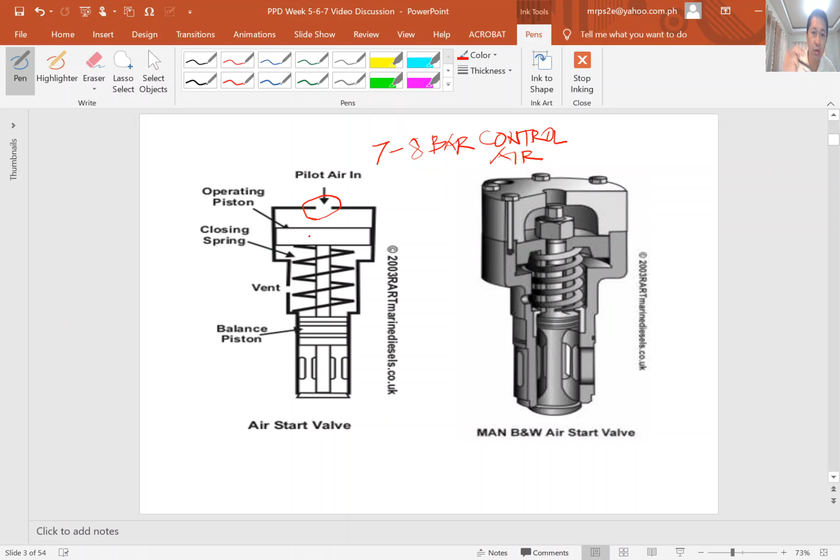So that in this area here will open. So here in this area will open the 30 bar. So later on we will see the diagram. So the 30 bar air starting pressure.

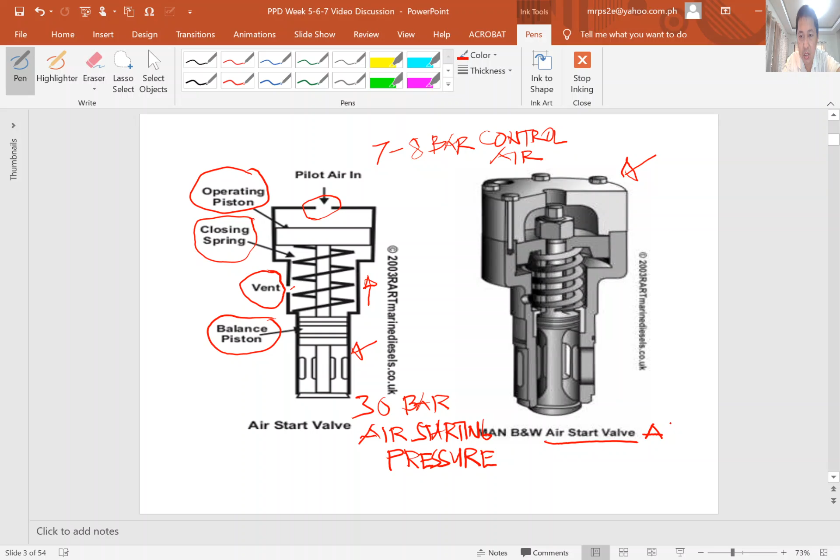So this is your air start valve or air starting valve assembly. So in the manual, or the engine instruction manual, this is written like this: assembly, air start assembly.

Next, I have here the exploded view of the air start valve of the engine. Since when I was ordering parts, I saved this picture in my computer, so now I attach it in this video. This is taken from the instruction manual, the spare parts catalog or the code book of the main engine which I worked on before.

So here I will show you, this is advanced knowledge for you. When you are ordering parts, for example, so this is the main engine code book in my ship before. For example, you are an engineer, marine engineer, so you order spare parts. In here, this one is what we call piston. So I will mark this one. This is piston.

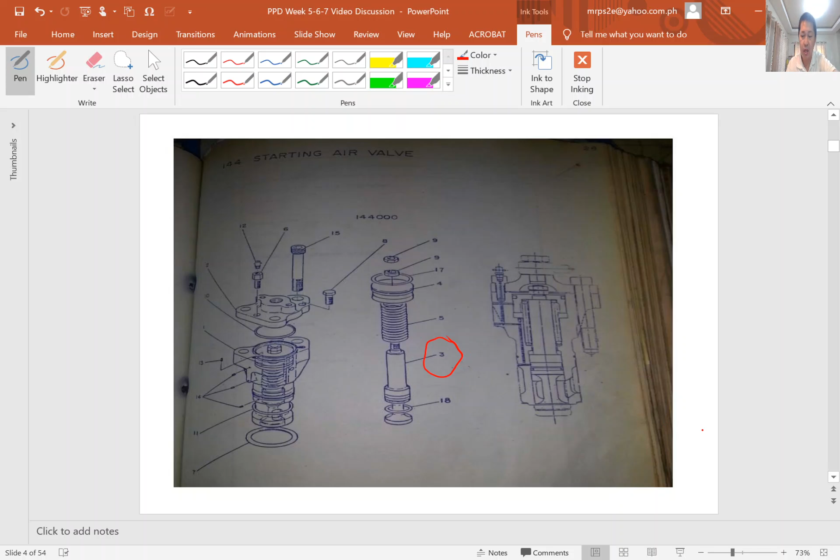So you will proceed to the next page. So here you have the number 3. So this is your reference number 3. This is number 3, and this is your description. Sorry, this is not the piston, but this is the valve stem. So this is the valve stem. So you write on your requisition form the reference number and your valve stem.

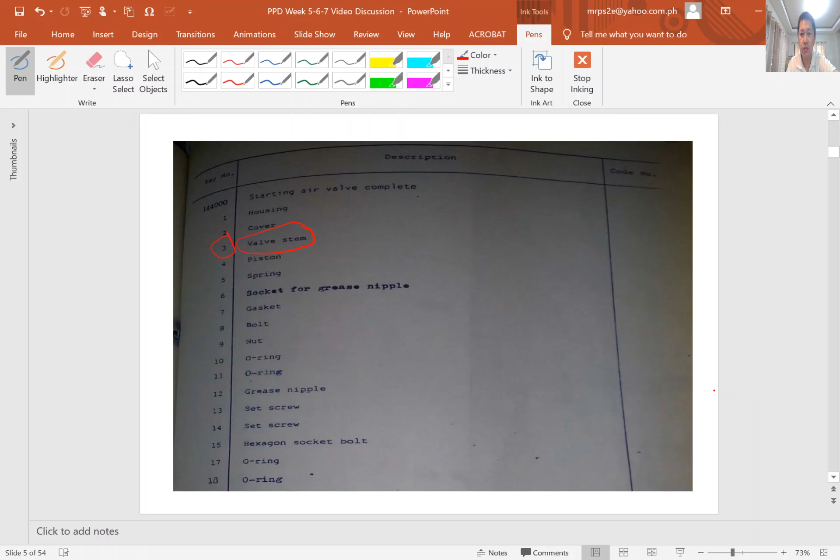But there is also another way, that there is a part number. So here is a reference number, but in most spare parts catalogs there is a part number. So we will proceed. So in another drawing, we will see another example of ordering spare parts. But here, we will discuss the system in which the air start valve is used, and its working process. So we will read the statement here below.

The pilot air enables the compressed air from the receiver to enter directly to the engine cylinders. The distributor valves provide air to operate its starting valve in the correct order and timing. The automatic or remote operating valve allows main starting air to pass to the start valve manifold.

So in this statement, I would recommend all cadets or all students studying this video, we will always use the diagram when we study the engine, because in this statement it is difficult for you to understand. So we will always use the drawing as well as the diagram to help understand the system. So now I will explain to you. I always recommend to my students to study the drawing and diagram in comparison to the explanation, so that we will understand easily.

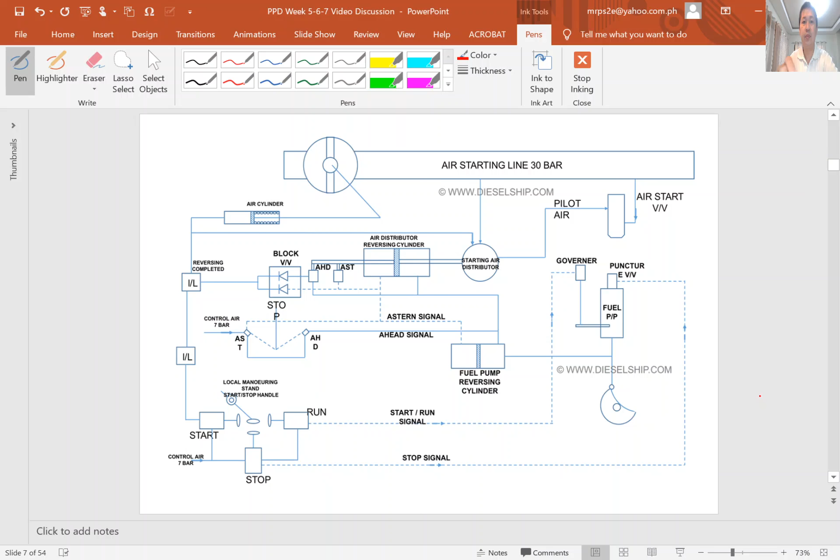So here, in this diagram, this is a simple diagram of the air starting system. So this is the diagram of the air starting system.

So now we have here the 30 bar. So this is 30 bar pressure. So from your air tank, it is traveling through the pipe. And this is your air cylinder. So it is showing here the local maneuvering stand.

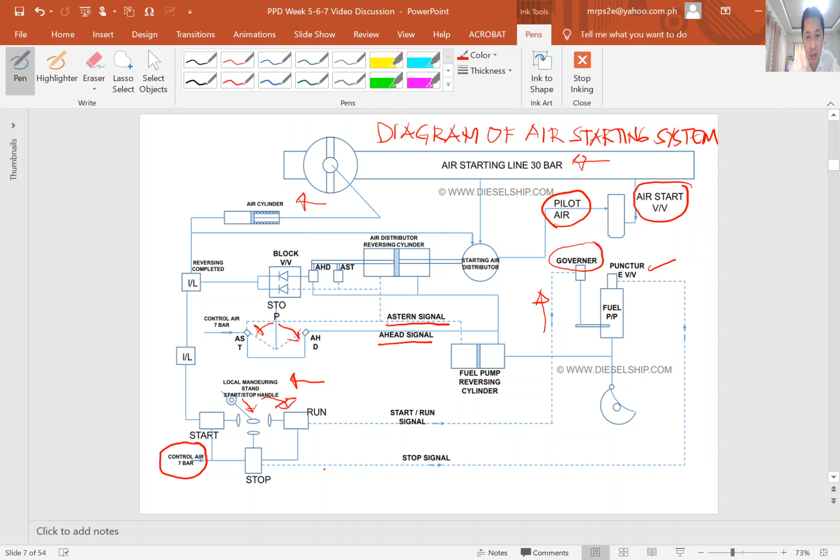And here we also have the puncture valve. The pilot air travels here to the puncture valve to open it. If this puncture valve is not opening, there is no fuel being pumped, because this puncture valve will open.

Actually, this puncture valve is a combination of the suction valve and the puncture valve. In some fuel pump systems, there is a separate suction valve on the bottom and the puncture valve on top. But there is also a puncture valve combined with the suction valve, as in this fuel pump. This is the puncture valve. So now you are ready. Now you start the engine.

So the 30 bar pressure, you see, this is the starting air distributor. When, for example, by the timing, cylinder number 1 should open. This starting air distributor has holes; for a 7-cylinder engine there are 7 holes: 1, 2, 3, 4, 5, 6, 7. When cylinder number 1 should be open, the hole of cylinder number 1 will open, and so on up to 7.

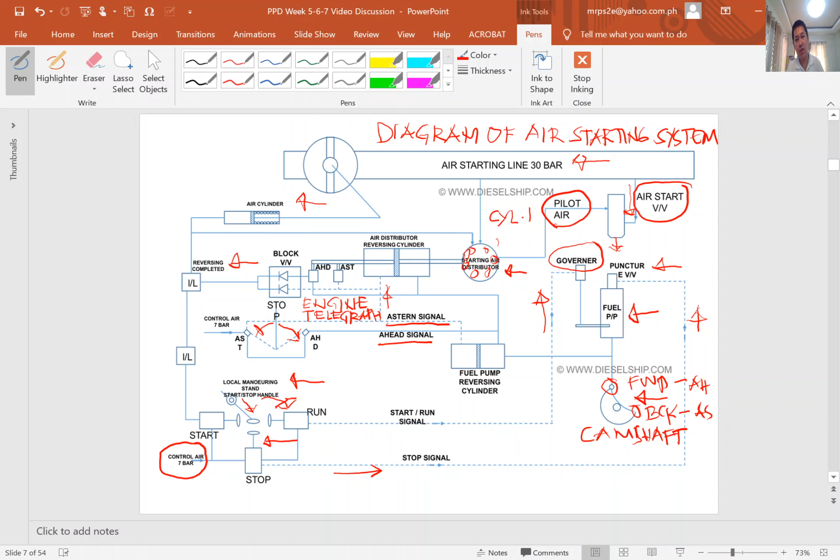You see here the reversing mechanism. So when the cam is here, you put the lifter here in the astern, so the engine will reverse, and you put the lifter here in the ahead of the cam, so the engine will move forward. So that is the reversing system.

So I will stop this video now.

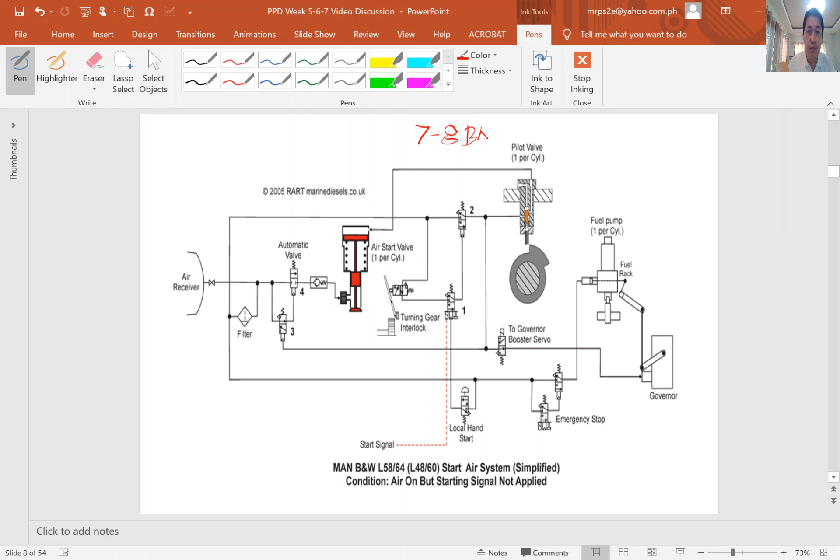We have here the starting air system also. So this can be also applied to the diesel generator. So we assume this system is used for the diesel generator. So the same principle. You have here the pilot valve. So this is pilot air, 7 to 8 bar. Pilot air.

So you have here the air start valve. See? This is air start valve, this one. And you have here the automatic valve. So this is solenoid. So by analyzing this drawing, you just start from number 1. See? Number 1. So you have the local hand start. Solenoid, just push the solenoid. And you have also here the emergency stop solenoid.

Now, you see this is pilot valve here. When you push this, we are assuming that this is used for diesel generator start system. So you have here the air tank, air receiver. So just open this valve. So from air receiver, the air will travel. So see, air travel here, go there, travel there, going here. So when you push this local hand starting, allowing the air to pass in here, going there to the

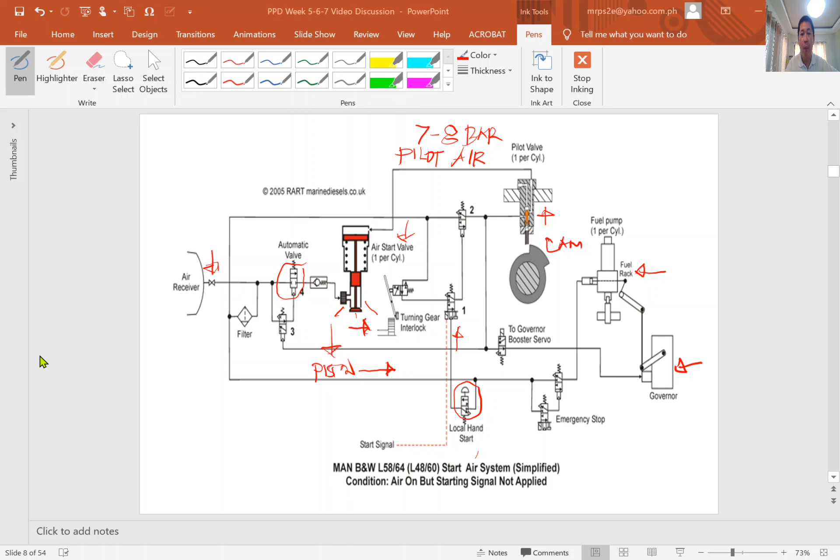So that is how the starting air works. So very simple, but when it's your first time, it is difficult to analyze. Now this is advanced knowledge for the cadets. So always use diagrams when studying the system. Next. So let us proceed to the cylinder head.

Cylinder head. A diesel engine cylinder head performs several functions. First, they provide the top seal for the cylinder or the cover of the cylinder bore or sleeve. Second, they provide the structure holding exhaust valves and intake valves where applicable for the four-stroke engine. Also, the fuel injector and necessary linkages. So that is the construction as well as the function of the cylinder head.

So remember, these are the basic parts fitted on the cylinder head. Or the function: seal the cylinder bore or the liner. Second, provide a structure holding the exhaust valve. So the exhaust valve is fitted to the cylinder head as well as the intake valve for 4-stroke engine. Fuel injector also is there.

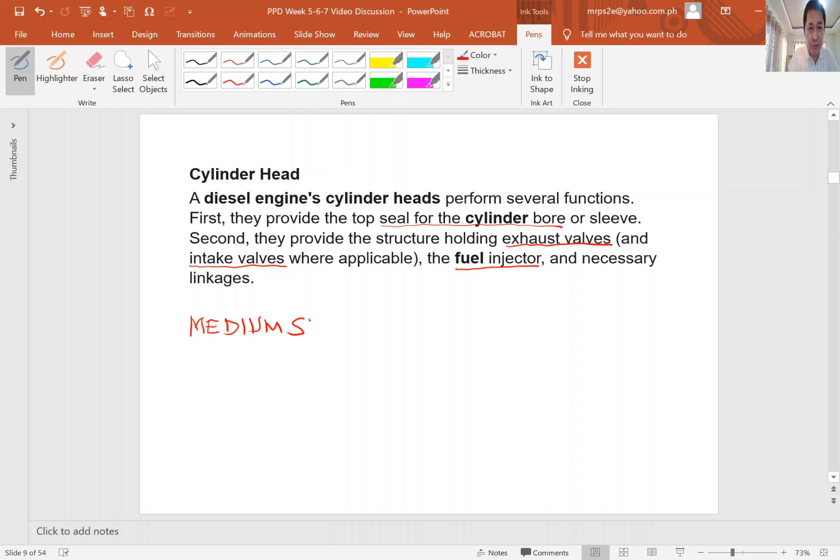And necessary linkages. So this is the function as well as the construction of the cylinder head. Next. So we have here cylinder cover. In a medium speed engine, just like the diesel generator engine, we call it cylinder head. So for medium speed diesel engine, we call it cylinder head.

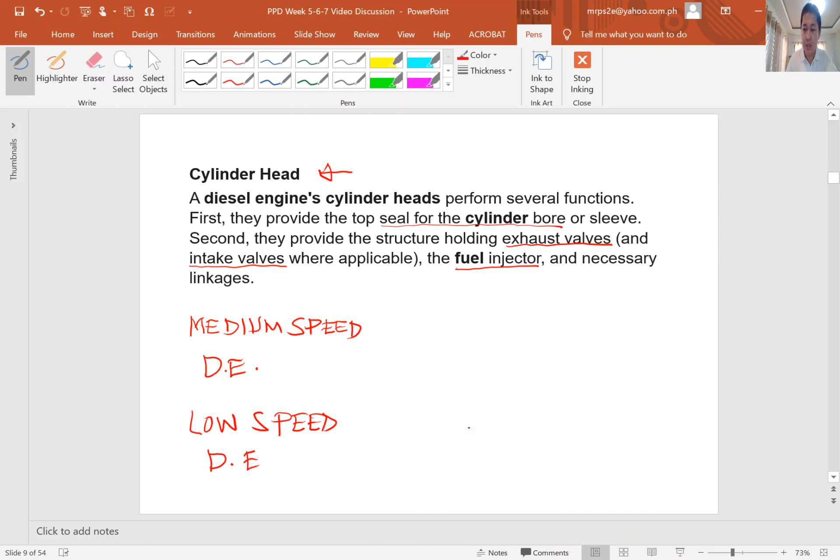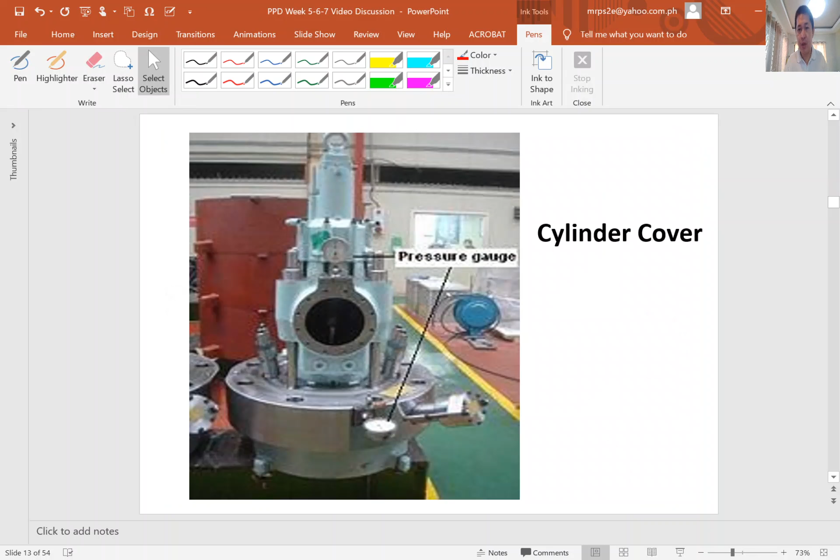So next. In this example, I will show you the parts of the cylinder head. In this engine, the cylinder head here is used for small engine. So there is only one cylinder head in the assembly because of this small engine. So the parts we have here:

Rocker arms. So this one is rocker arm. You have here the rocker shaft from here to there. Stud hole, the hole here for the stud. A stud is threaded, just like a bolt but without head. Springs close valve, the spring housing for thermostat. Intake ports, the hole for bolting rocker cover.

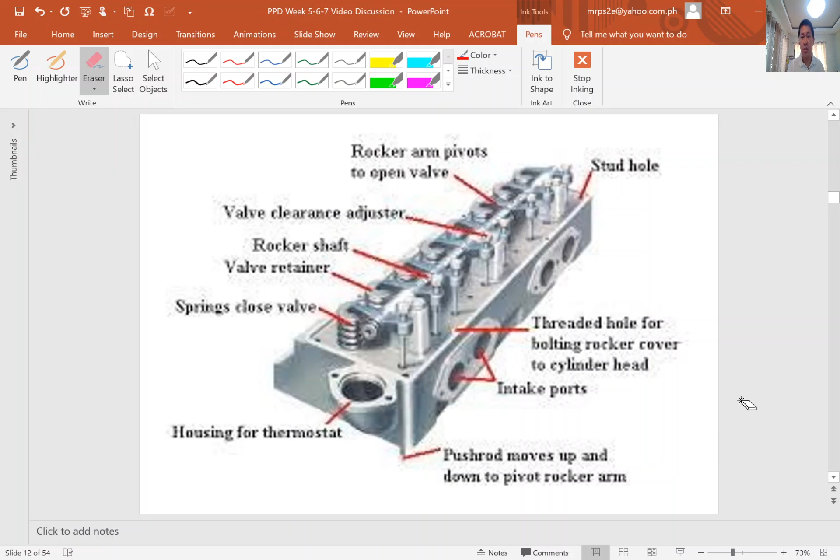Valve clearance adjuster here. So just read what is written here. These are the basic parts fitted on the cylinder head. So we'll proceed to the next. This is for small engine. Here we have the main engine of the ship, which we call cylinder cover. So this is cylinder cover. Here on top is the exhaust valve. Cylinder cover is this one.

See, this one is cylinder cover, or cylinder head. And this one is the exhaust valve assembly. So this is the cylinder cover assembly.

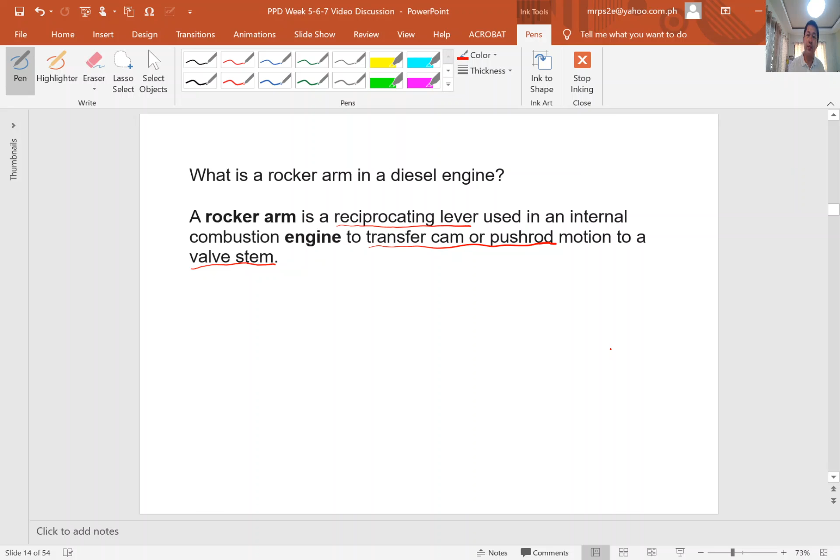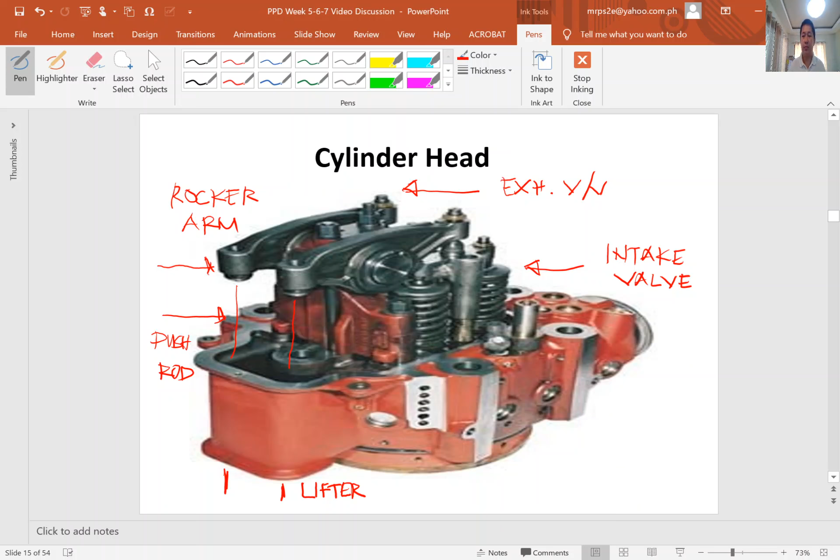So this is the actual photo. In this example, this is a two-stroke crosshead type engine. So you see you have the rocker arm in here. This is the rocker arm, and this is the push rod.

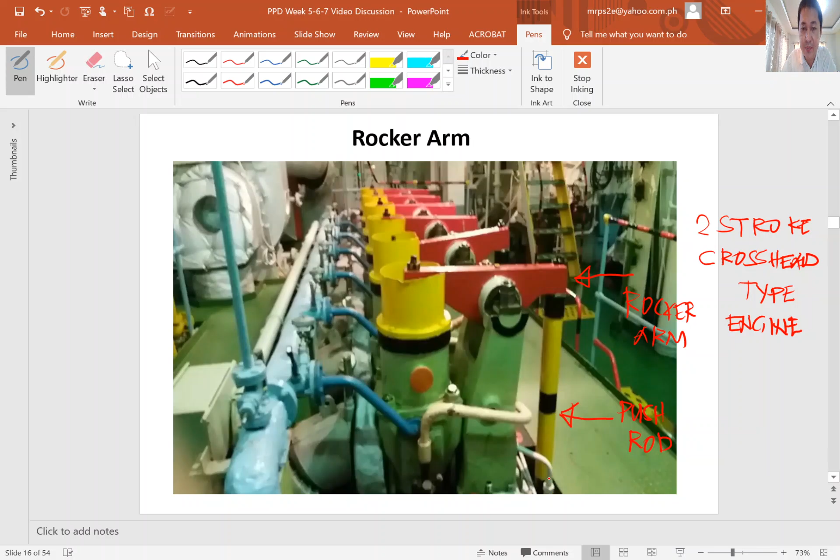So when this push rod is operating, moving in a reciprocating motion, up and down, by the rotation of the camshaft down below, this rocker arm is pushed upward, then the other side of the rocker arm will push the exhaust valve downward to open the exhaust valve. So this is the exhaust valve. So that is the use of the rocker arm. That is an actual photo.

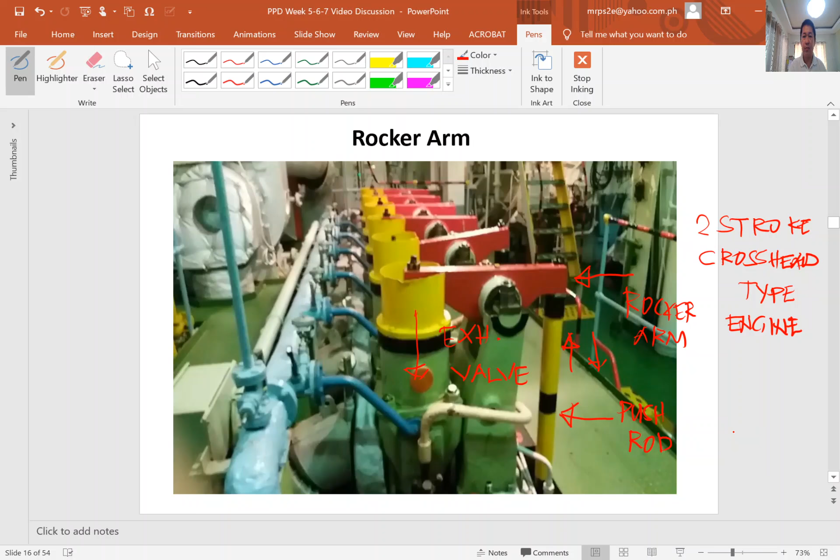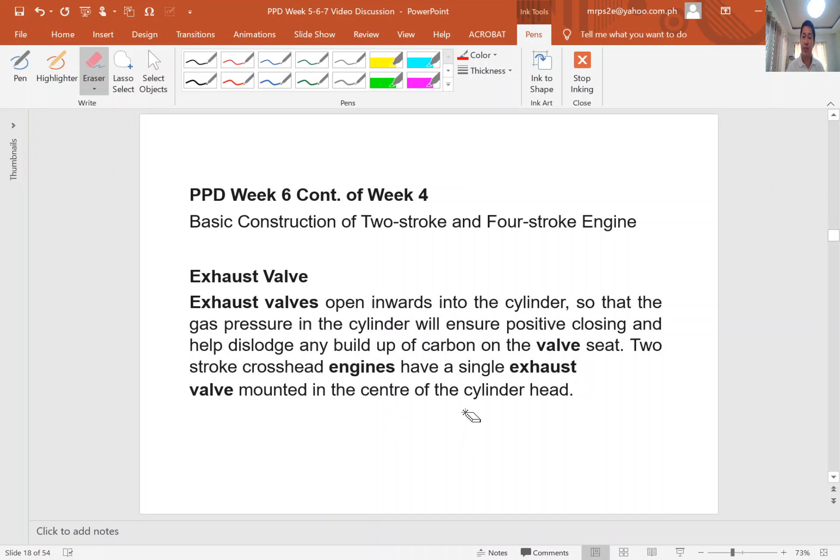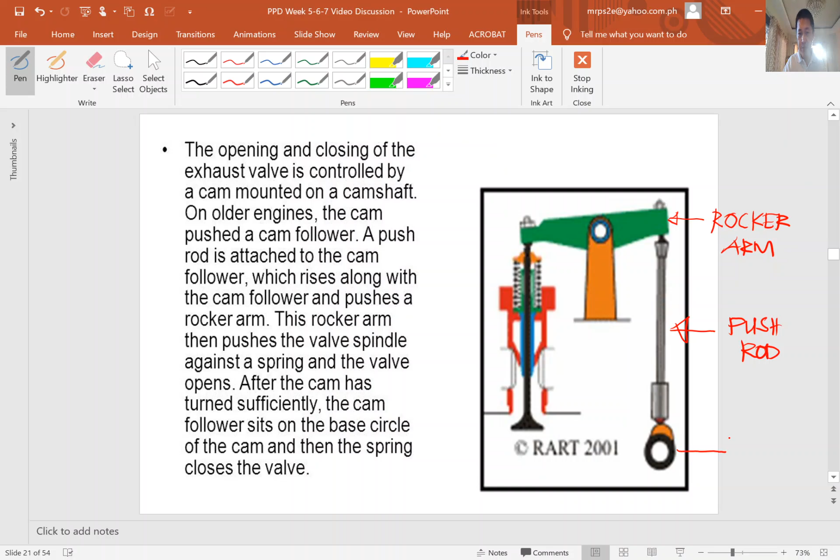So we have here, I will explain to you. So instead of using hydraulic, we are using a rocker arm. So this is the rocker arm. So this is in contrast to the hydraulic system. Rocker arm, and this is pushrod. And this is camshaft. And this is cam follower or lifter.

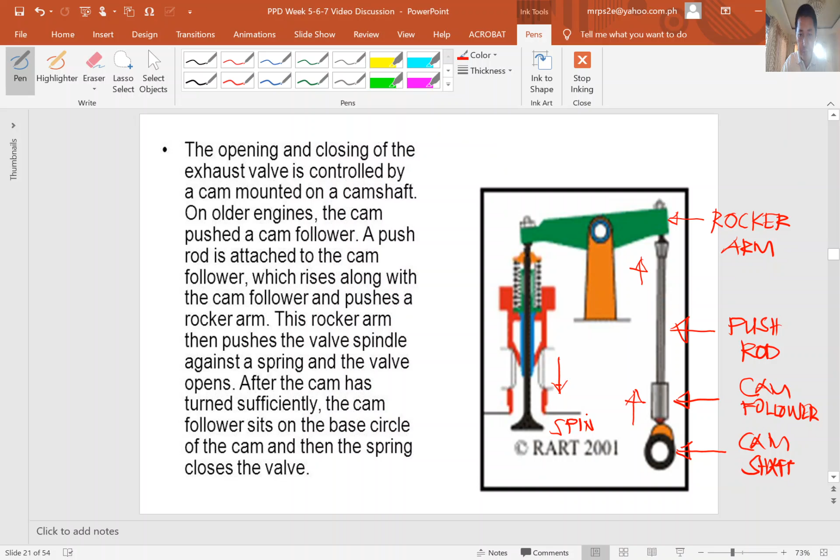So when the cam is rotating, you see, the cam will push the cam follower upward, you see, and your pushrod is pushing the rocker arm upward on the right side here. And the left side of your rocker arm will push the spindle downward, you see. This is your spindle. Valve. So the exhaust gas will release here from the cylinder.

So when this cam is not in the right position to open the valve, supposedly this side is there, so the rocker arm will move down because the pushrod will move down again. So the spring, you see, you have a spring here, will be used to close the spindle. So this one will close again. So it's simple.

So that is the operation of the mechanical type instead of the hydraulic type. So mechanical type, by the use of the pushrod, cam follower, and rocker arm, the exhaust valve will open and close. So this is exhaust valve. This one is exhaust valve.

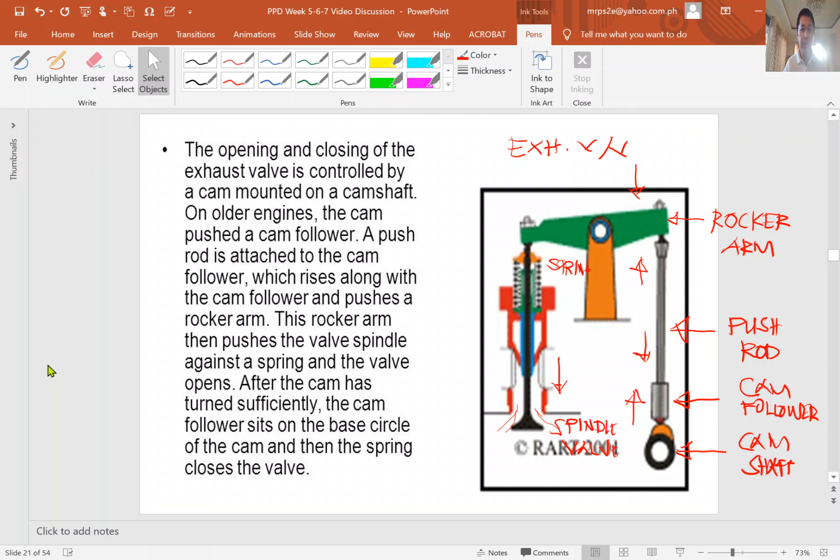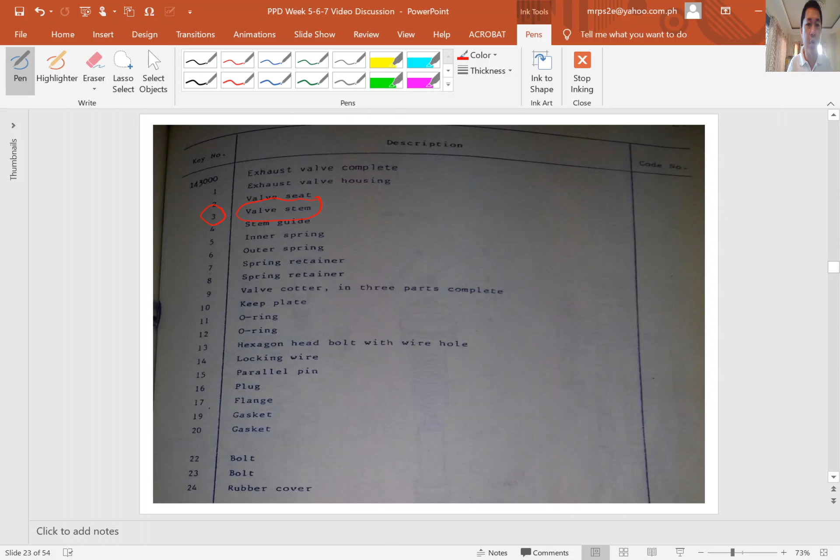So this information you have to write on your requisition form. So that is how to order spare parts from the maker, through your company. So we have here - it's not showing here the diagram - so this is used for a small engine. This is a small engine.

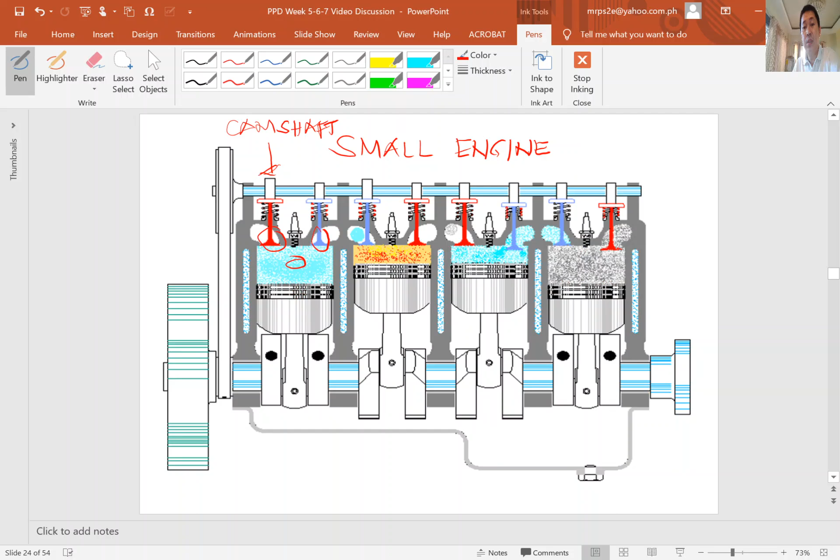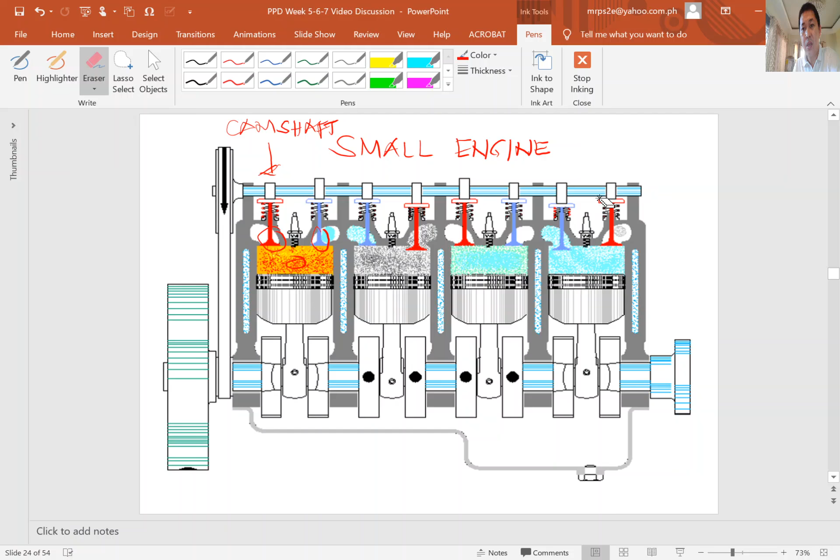So you see you have an exhaust valve, intake valve, and you see combustion in here. So in the small engine, your intake valve and exhaust valve are opened directly by the camshaft. This is the camshaft. You cannot see the rocker arm here, and you cannot see the push rod, because your valve with its spring is opened directly by the use of the cam. So this is the cam, it directly pushes. There is no push rod and no rocker arm. So this is applied for small engines.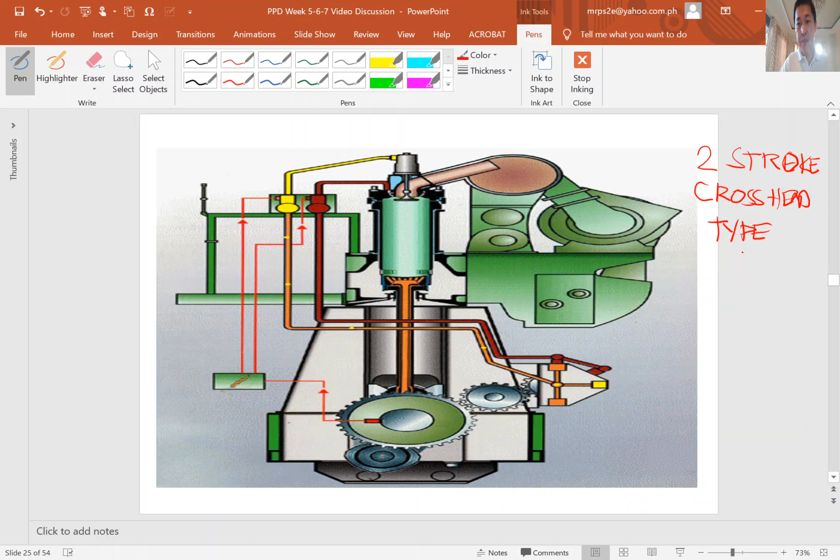So this is a two-stroke crosshead type diesel engine.

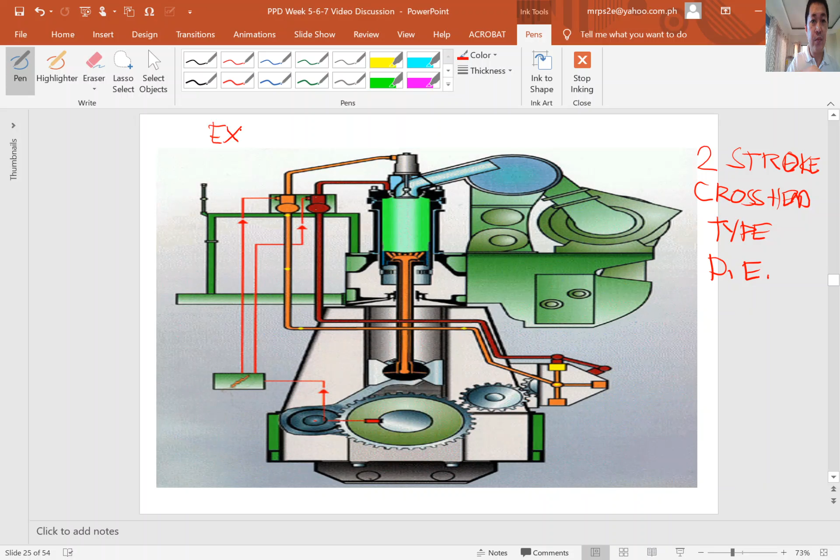So as you can see here, this is hydraulically controlled. So the exhaust valve is operated by hydraulic pressure.

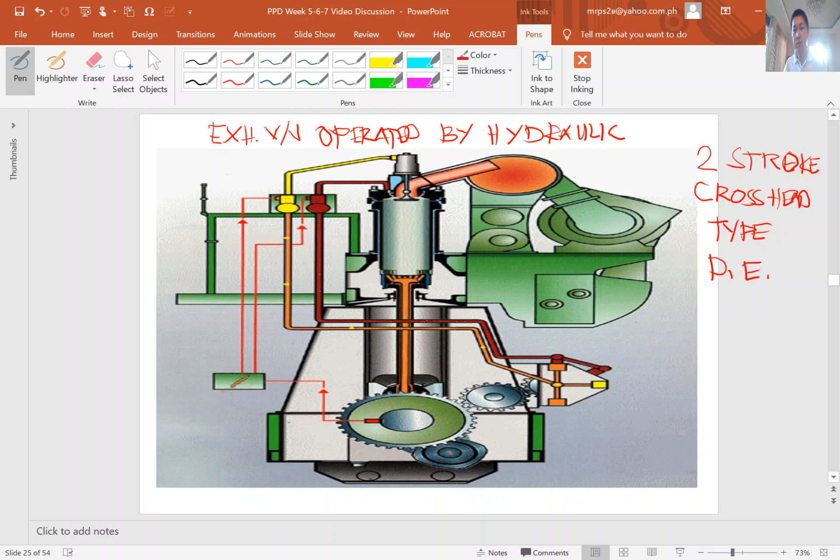So as you can see here, your engine is running. So this is your exhaust valve. So when the pressure of oil, you see, this is the yellow traveling here. So when the camshaft is operating, the camshaft is here.

So it gives hydraulic pressure, lube oil hydraulic pressure, you see. It's moving here and pushing the exhaust valve. So the one closing the exhaust valve here is the spring. It's not showing here, spring air or the mechanical spring. So as you can see here, the exhaust valve is released to the turbocharger.

You see, so this is the turbocharger, operating the turbocharger to suck air. It's not showing here, this is only the operation of the exhaust valve as well as the combustion.

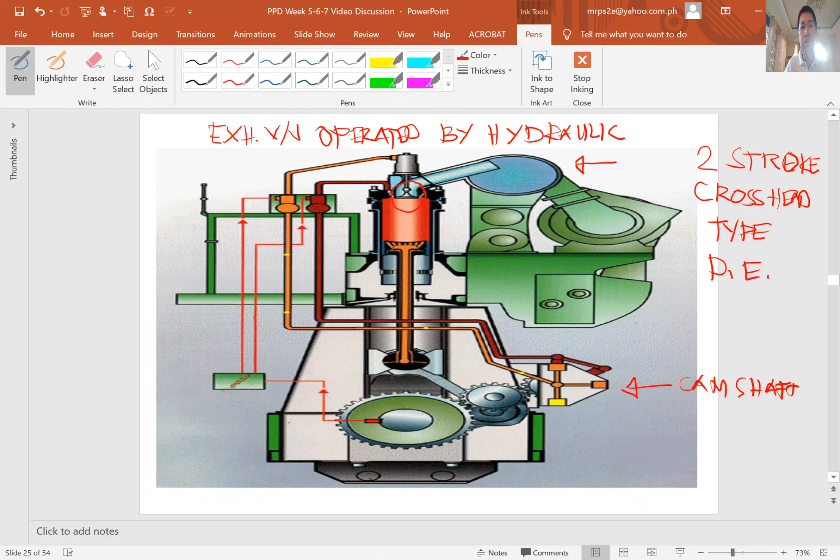So let us come to the cylinder liner. The cylinder liner forms the cylindrical space in which the piston reciprocates. So here, inside here, the piston will reciprocate inside here. So this is your cylinder liner.

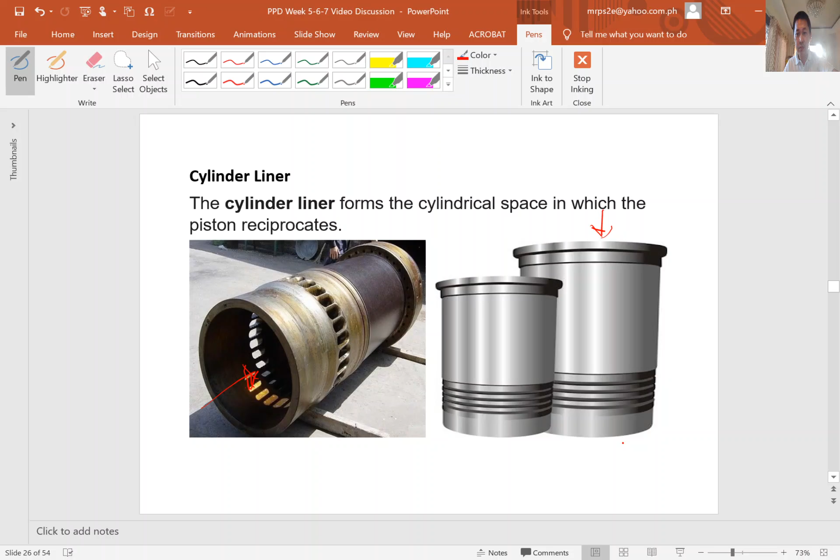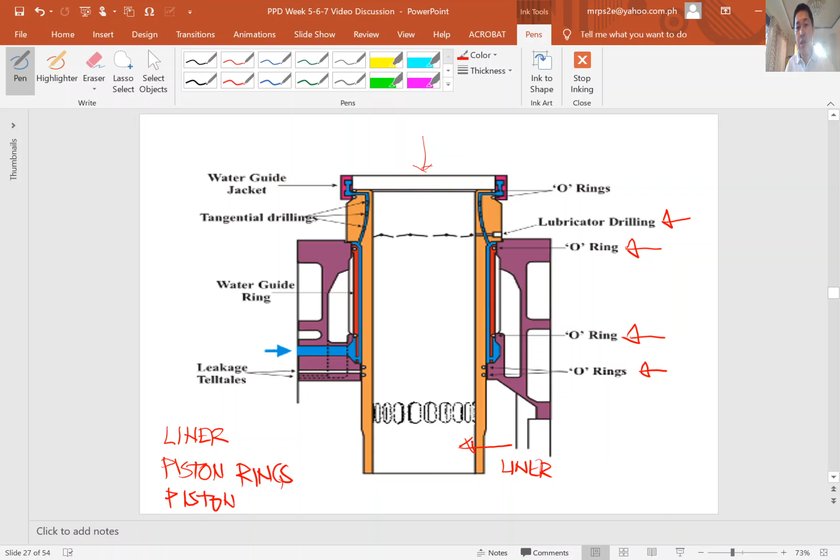So you have the water guide. So this is the liner, this one here, in the center, this is your liner. So that is the liner, the piston will reciprocate in this area. The hole here is the scavenging port.

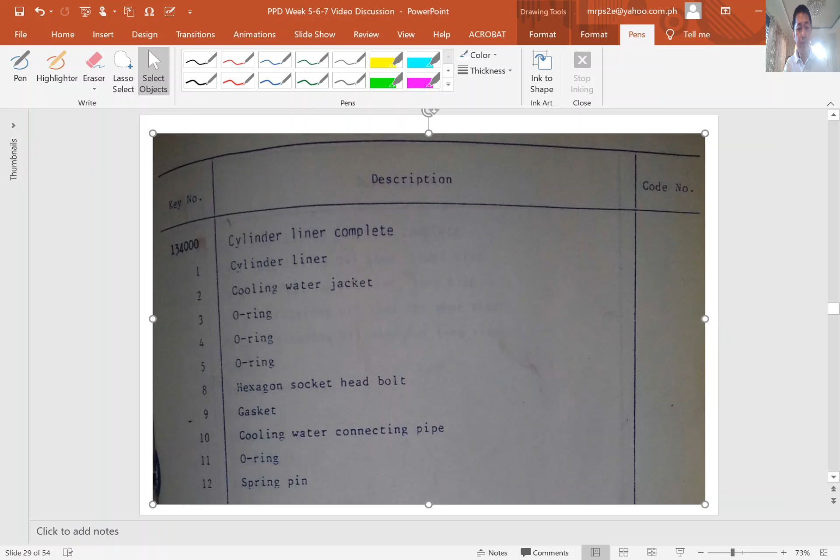So when ordering parts, the liner is subject to wear down, so you have to request this liner. So number one is cylinder liner. So if you are a second engineer, you have to order this one and look at the reference number, and your description. So here is the part number, you have to write in the requisition form.

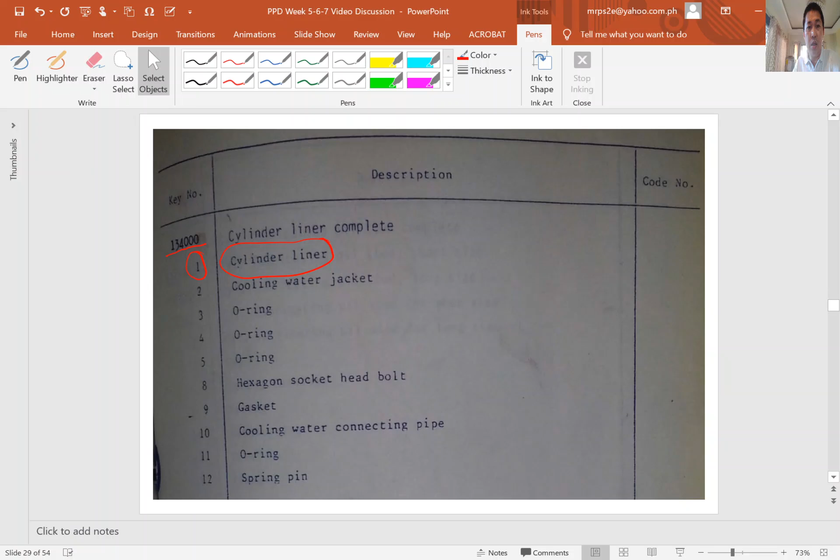So again, the operation of the exhaust valve. This is the operation of the exhaust valve, it was explained a while ago, so you just rewind the video for the explanation of this operation of the exhaust valve.

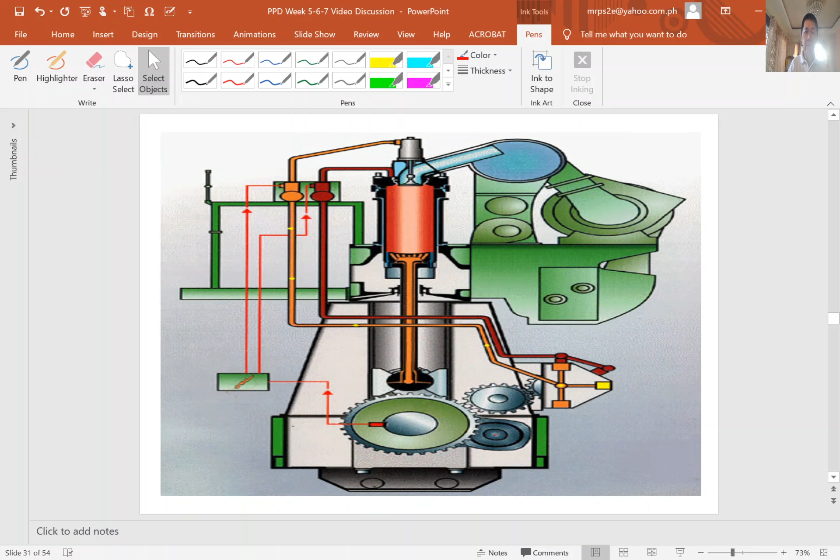Now let us come to the cylinder head.

So cylinder head, a diesel engine cylinder head, performs several functions. First, it provides top seal for the cylinder. Second, it provides structure holding exhaust valves, intake valves where applicable, fuel injector, and other needed components.

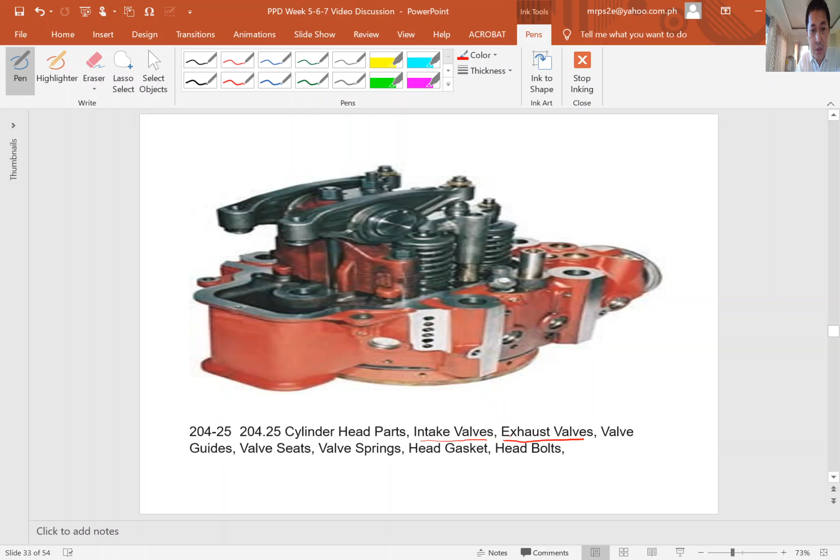This is already discussed before, just rewind the video. So in this you see the parts: the intake valve, exhaust valves, the guides, valve seats, valve spring, the head gasket, and the head bolt.

So it is all here. The valve spring, this is spring, you see. The guides is inside here, and the valve seat is inside here, you cannot see it in this drawing. The gasket is here, this area. Head bolts are in this area here. Intake valve, so this one here inside, intake valve, exhaust valve here.

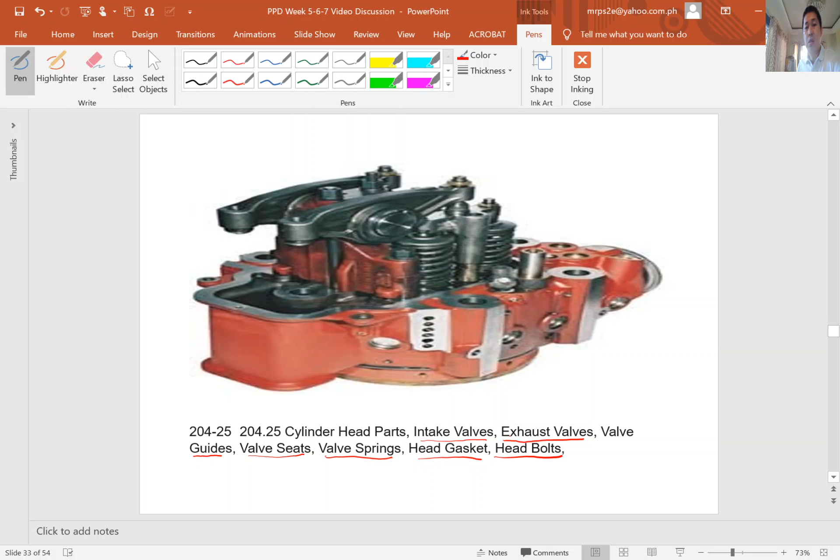So in ordering spare parts, here, this is for a small engine. So here you have what we call part number. As you can see here, this is the part number.

And we have here, for example, this description here. So this one is description. Parts. And here you have the reference number.

So very simple, you just write all this information. For example, you request this one, number 17. You need this one, so just locate number 17, you see, which is head bolt. And you write to your requisition number. But in requesting, you have to write the engine type, this is very important. Or engine model.

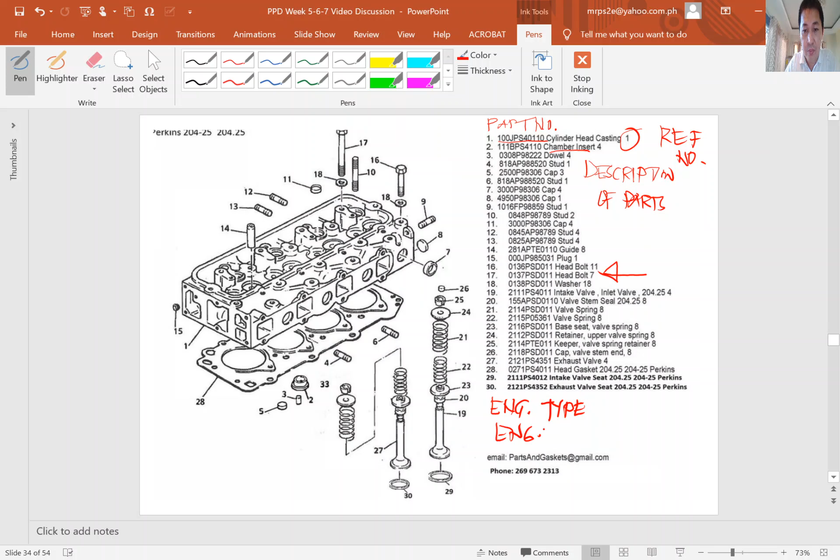So this is the same, and maker. For example, B&W, or for example, Daihatsu.

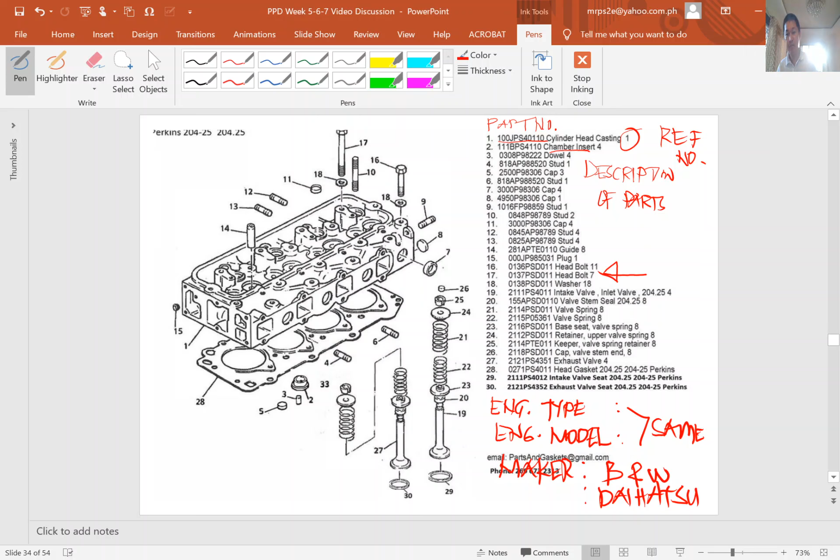So that's the way how you order spare parts. So this is your main engine cylinder cover. I already discussed this video before, so just rewind the video, this picture.

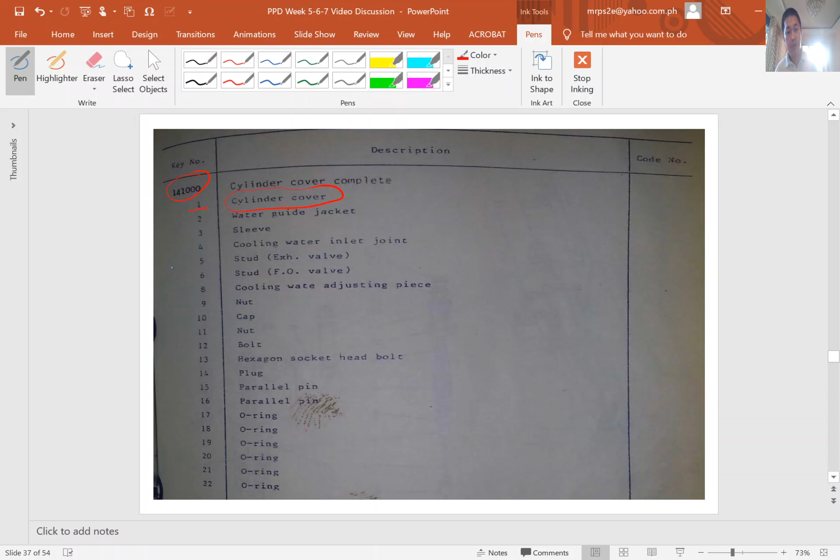In ordering spare parts, so it's the same now. For example, you have to order a cylinder cover complete. Take the reference number, look at here, the part number. Here is the part number, and you have here the reference number, and you have here the description. So don't forget to write the model, engine type, engine model.

Now let us continue here. In week 7, this is a continuation of week 4, the basic construction of 2-stroke and 4-stroke engine.

So we have here the basic construction of stuffing box, crosshead bearing, and crankshaft. Now we'll start with the stuffing box, for 2-stroke crosshead type marine diesel engine.

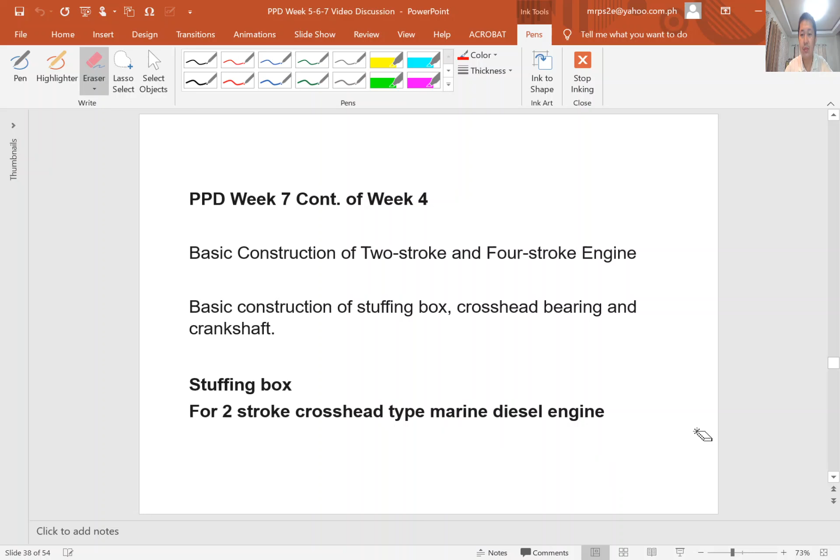What is the stuffing box in main engine? Stuffing box, or piston rod gland box, is a unique feature of 2-stroke marine diesel engine. It is nothing but a seal between crankcase and under piston space, scavenging space or scavenge space. Its function: it prevents the dirtying of the engine bearing oil by combustion residue. So we'll see what this statement means.

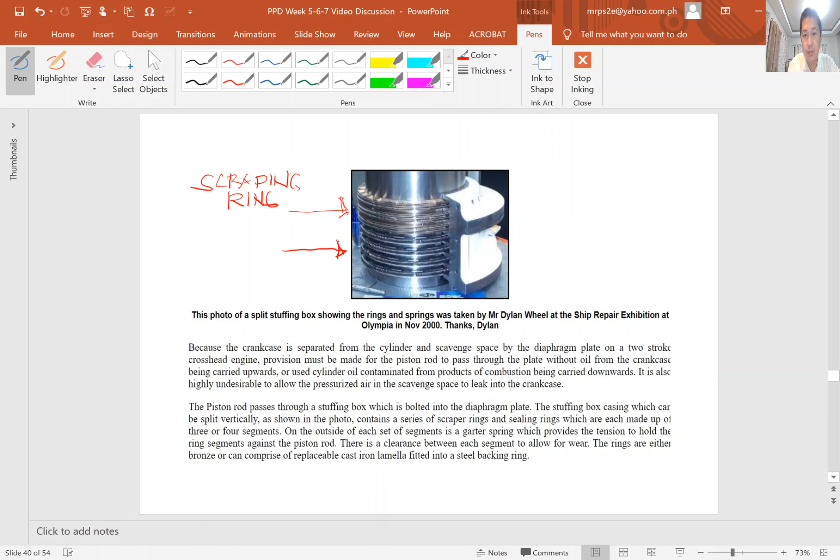These are sealing rings, which are each made up of 3 or 4 segments. On the outside of each segment is a garter. So of course there is a garter here to hold. This is a spring, but here we call it garter. So spring garter. Garter spring, which provides the tension to hold the ring segments against the piston rod. There is clearance between the segments to allow for wear.

The rings are either bronze or comprised of replaceable cast iron lamella fitted into the steel backing ring. So segments meaning you have the cut here. So in this portion, on the other side, so 3 cuts we have here. We have the cut here, this area, and at the back. So 3 cuts. So that is called segment.

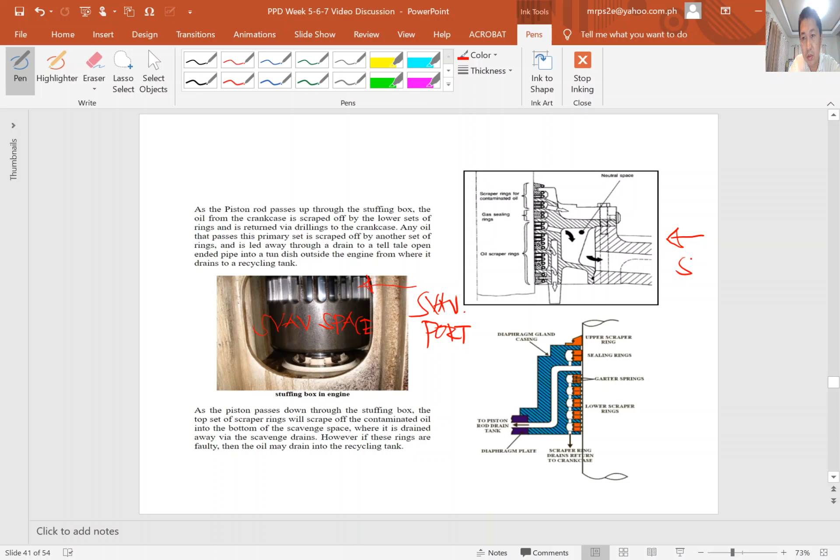So here is your stuffing box. So this part, this is the stuffing box. This is your stuffing box. So it is installed in this area. See, that is your stuffing box.

So as the piston rod passes up through the stuffing box, the oil from the crankcase is scraped off by the lower set of rings, and it is returned via drillings to the crankcase. Any oil that passes through the primary set is scraped off by another set of rings and is led away to drain to a telltale open-ended pipe into a tundish outside the engine, from where it drains to a recycling tank.

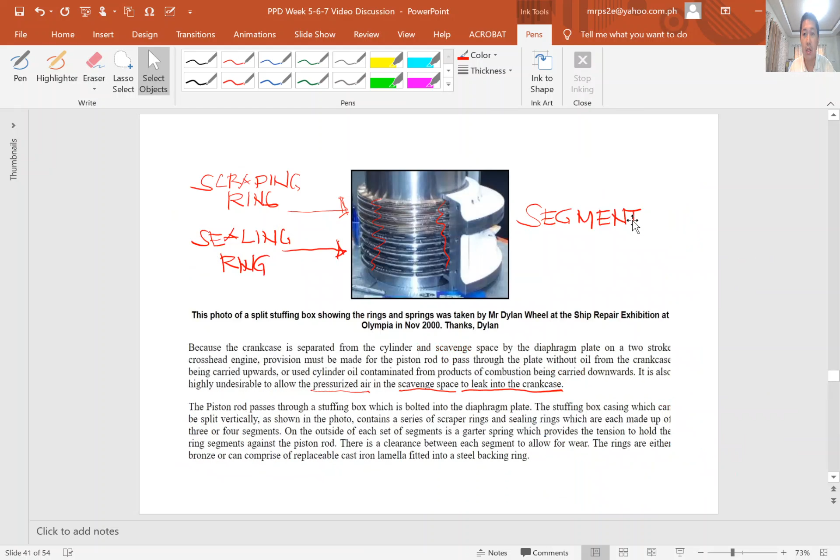So if a large quantity of oil is draining out, then the lower set of rings is faulty. If air is blowing out, the upper rings are worn. So the upper rings, which are the scraper rings, are used to seal the air from scavenging. What I mean is here. So the upper rings here, this one here, the scraper ring, are used to seal the air, and the seal ring down below is used to seal the oil.

So oil in the recycling tank or the stuffing box tank or scavenging tank can be purified back to the crankcase. So this can be purified, but the only problem here is the color of your oil is very black. So the color doesn't matter, but if it passes the lube oil test, it is still okay. However, this is not necessarily a good idea.

So this is correct. It may be contaminated by the used cylinder oil, which mixed with the crankcase oil causes an increase in viscosity of the crankcase oil. Calcium deposits in the bearing oil lead to damage, and the oil may be carbonized and deposit on the underside of the piston crown when used as piston coolant. So often this contaminated oil is just landed ashore or burned.

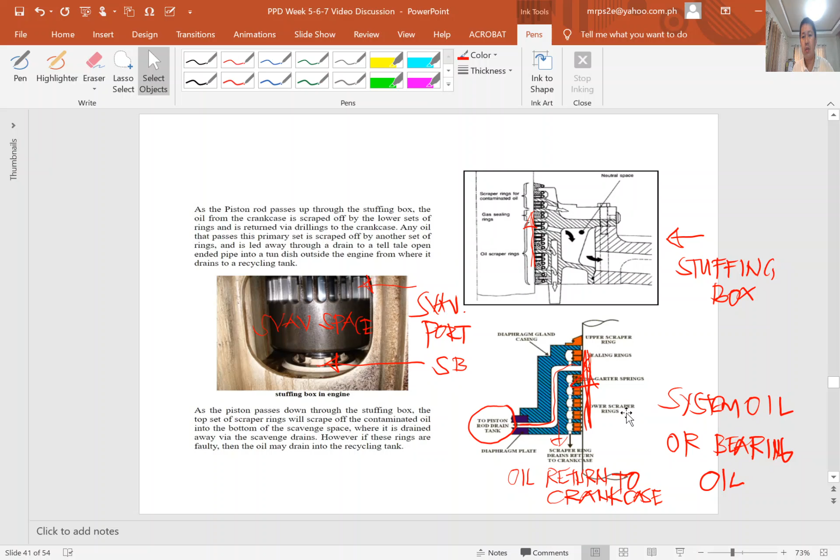So here, returning the leak oil is not advisable, but you can purify it. What I did when I had this trouble before, the leak of the stuffing box: I returned it to the crankcase because I monitored that the leak was 20 liters, I think 20 liters per 2 hours. That is too much. Even after I overhauled it, there was still a lot of leak. So I returned the oil to the engine because it was consuming a lot of oil, but it is not advisable to do.

So now we are done with the stuffing box. We will proceed to the crosshead. So what is a crosshead? A crosshead is a mechanism used as part of the slider crank linkages of long reciprocating engines and reciprocating compressors to eliminate sideways pressure on the piston. Also, a crosshead enables the connecting rod to move freely outside the cylinder. So this statement we can see here.

So this is a two-stroke crosshead type diesel engine. So we will see here. You see the crosshead. This is the crosshead. So the function of the crosshead: it is connected to the connecting rod and also connected to the piston rod.

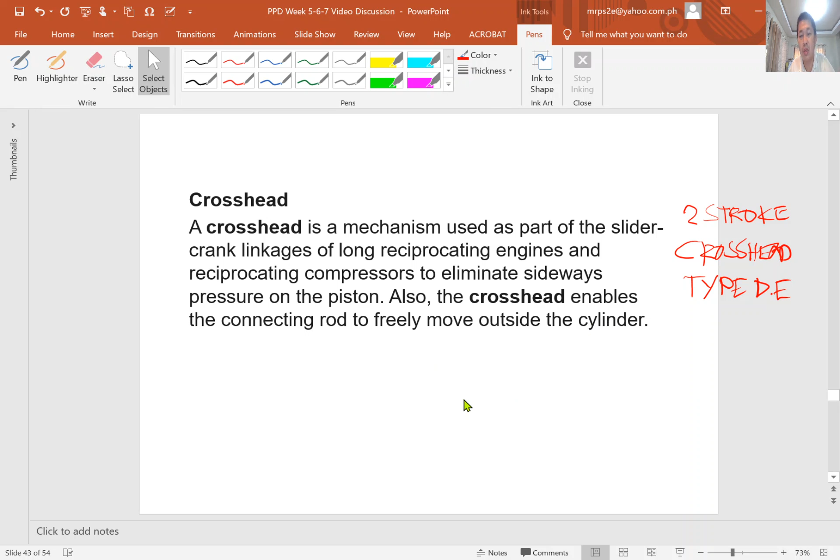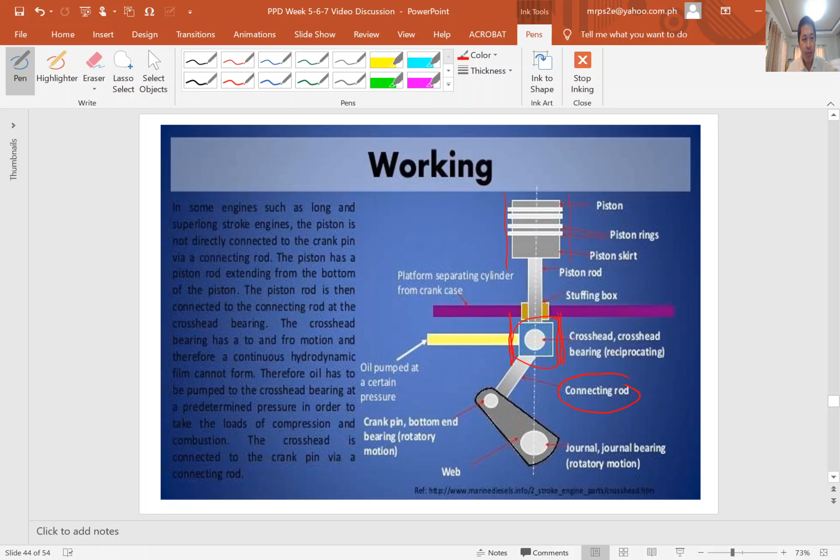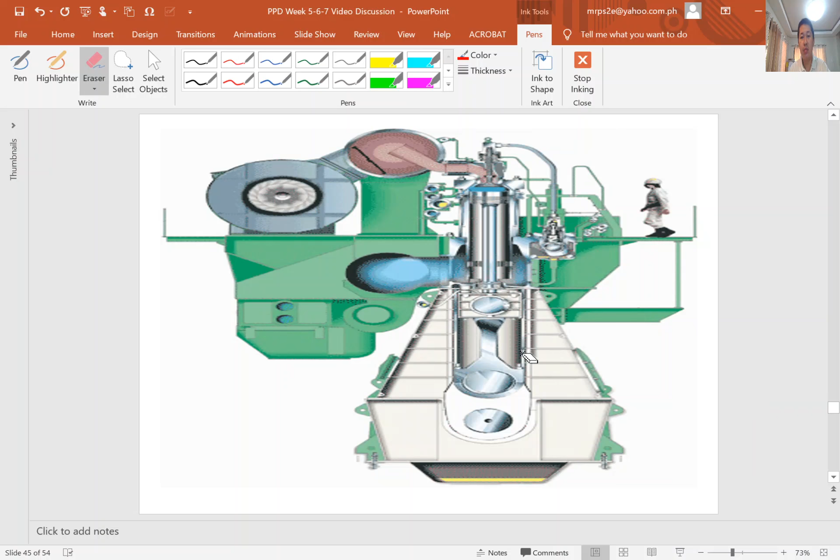This is the crosshead bearing. So this is the upper bearing and this is the lower bearing, crosshead upper bearing and crosshead lower bearing. This bearing is subject to inspection, what we call the CMS, continuous.

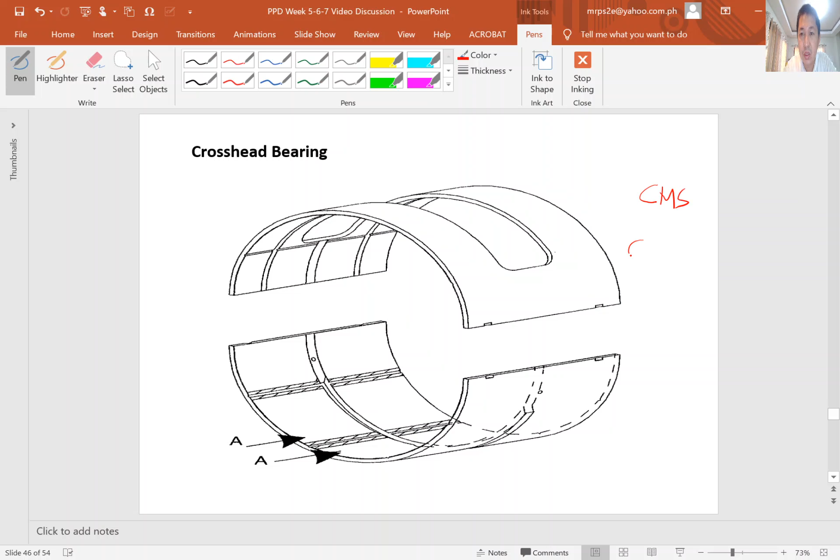Survey. So this is subject for continuous machinery survey. This is CMS, and this is to be approved by class surveyor. So the class surveyor will give the CMS certificate.

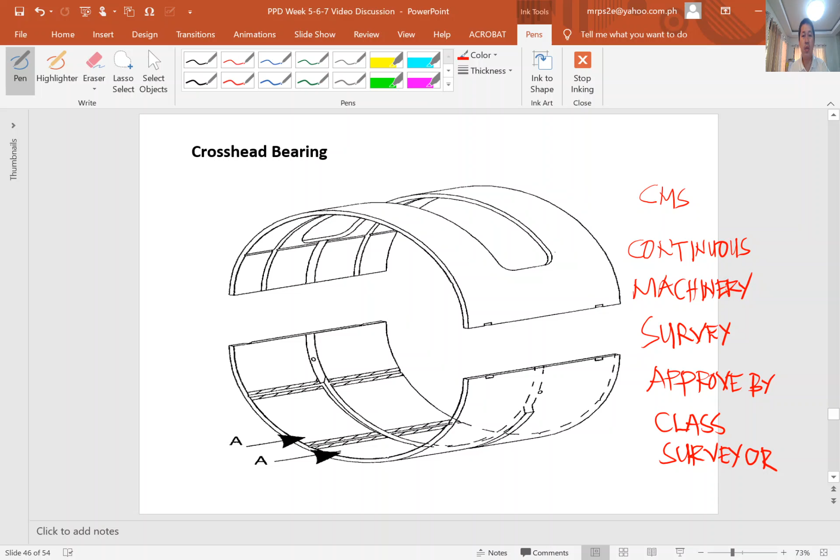So the one who will do this one is alternate. So for example, for the next survey, the surveyor will make the survey, and for the next one, the approval is the chief engineer. The one who will do the inspection is the chief engineer. So that is the role of the class. So that's alternate. So the chief engineer will make a report for the survey, either bad condition or good condition. Either you replace the bearing or you put it back with the same bearing. So it depends on the condition.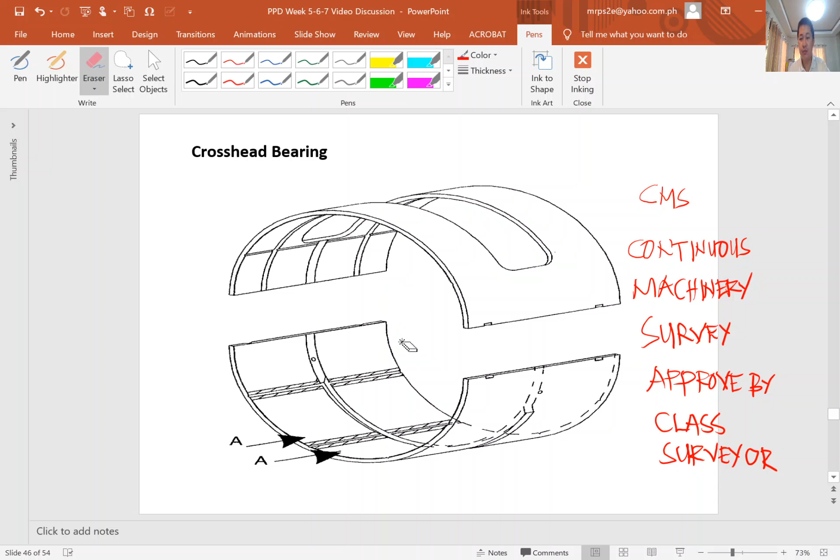Next, we will proceed to the crankshaft. So what is a crankshaft? A crankshaft is a rotating shaft which, in conjunction with the connecting rods, converts reciprocating motion of the pistons into rotational motion. Crankshafts are commonly used in internal combustion engines and consist of a series of cranks and crank pins to which the connecting rods are attached.

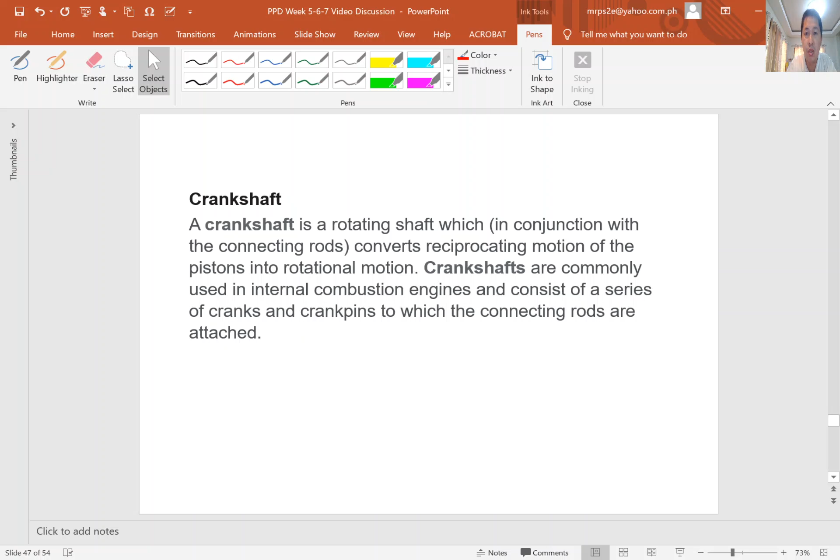it converts the reciprocating motion of the piston to rotational motion of the crankshaft. See? Reciprocating motion of the piston into rotational motion. So the crankshaft will now have a rotational motion.

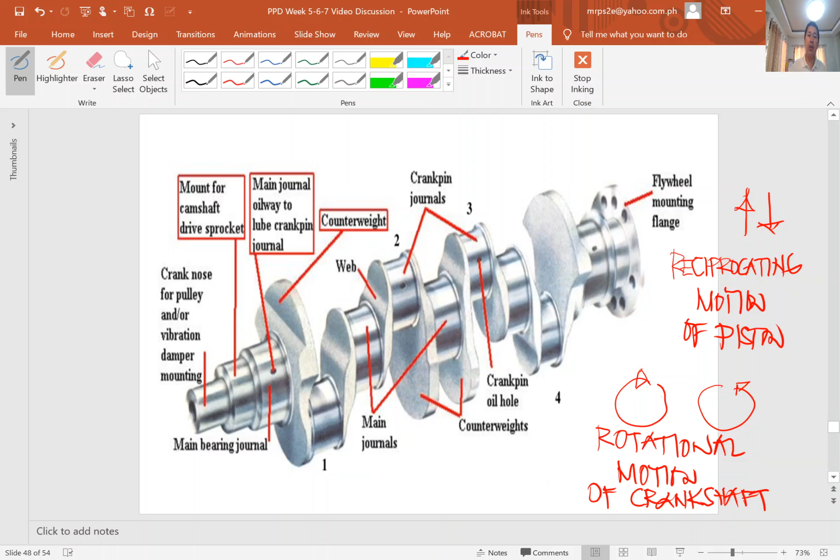So normally it is clockwise, like this. But there are also engines, though rare, that are counterclockwise. So counterclockwise is applied to twin engine propulsion. So this is the crankshaft. Reciprocating motion of the piston converts to rotational motion of the crankshaft. So that is the role of the crankshaft.

So we have here, what is the main difference between the inline engine and the V engine? So I will proceed in this topic. The main difference between them is in how the cylinders are arranged. Inline engines have the cylinders in a straight line, while the V engine has the cylinders grouped into two banks and arranged in a V at a certain angle, the arrangement leading to the name of the engine configuration.

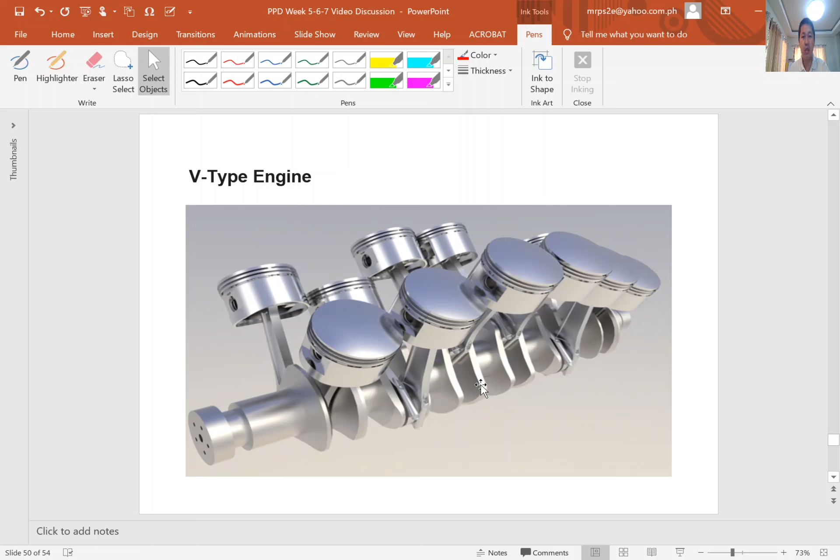So we have here the V-type engine, you see. As you can see here, the pistons form a V. The piston is inside the cylinder, so the arrangement of the cylinders forms a V. So this is a V-type engine. Inline engine, as you can see here, is in a straight line. So straight line is the keyword. The keyword of the V-type engine is the cylinders arranged in the form of a V at an angle of 60 degrees or 90 degrees. So it depends on the engine configuration.

So for the inline type engine, the keyword is the cylinders are in a straight line. As you can see here, the pistons are vertically arranged in a straight line. The piston is inside, so just imagine there is a cylinder head there, and this piston is inside the cylinder. So the arrangement of the cylinders here is in a straight line, which is called an inline engine.

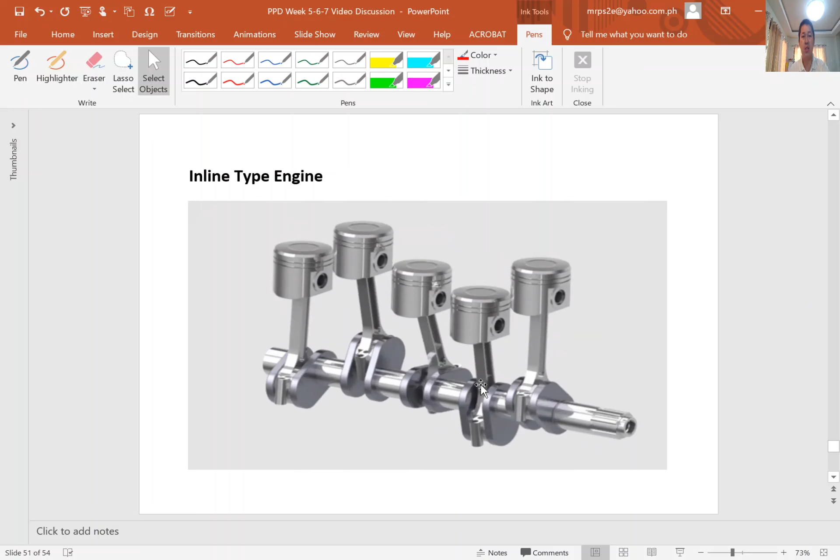There's also what we call a flat engine. So what is a flat engine? A flat engine, also known as a horizontally opposed engine, is a piston engine where the cylinders are located on either side of a central crankshaft. This is also called a flat or boxer type engine. I did not experience this engine when I was working on the ship, but as I know, it is used in SUV vehicles. The Subaru SUV engine is a flat or boxer type engine.

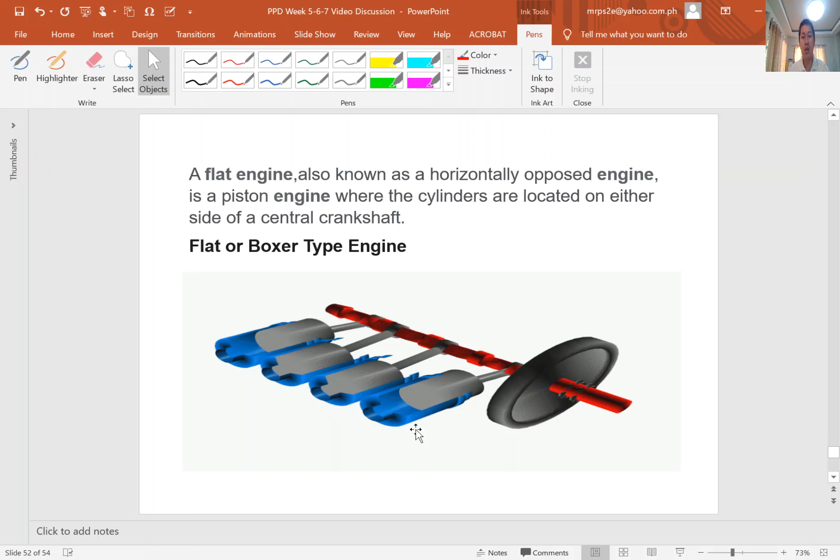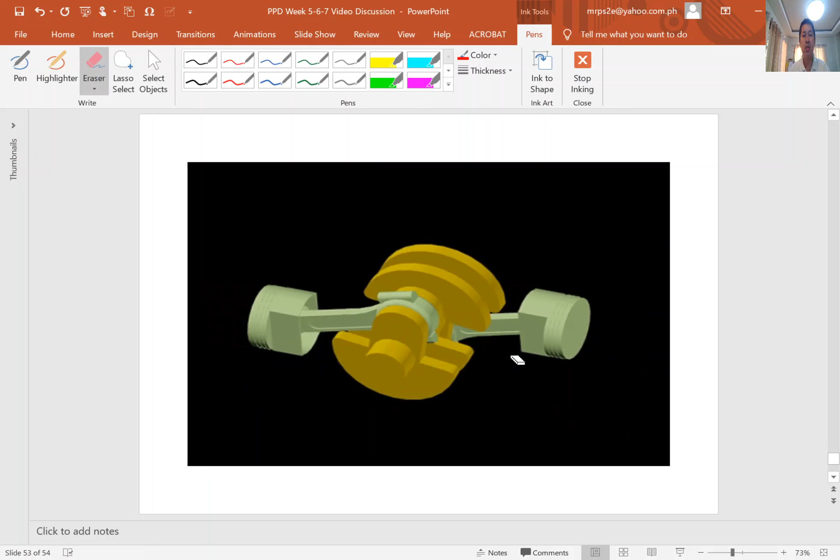So this one is horizontally arranged on one side, but we can also compare this engine with this one, the opposed engine. They are the same, but in this one the cylinders are arranged horizontally on only one side, while here they are arranged horizontally on both sides, the left side and the right side cylinders. Just imagine there is a cylinder here, because the piston is inside the cylinder. So this is the flat, boxer type, or opposed engine.